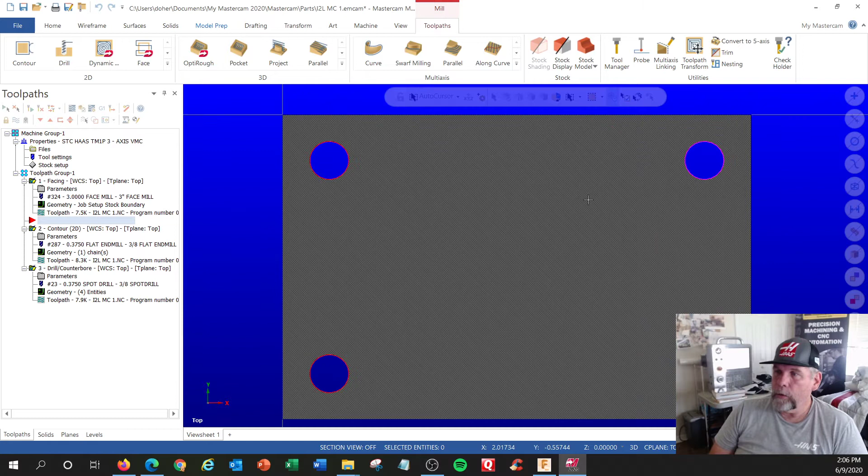All right, so I have my Mastercam on. Here's my Mastercam right here. I'm going to fit the window. Zoom up. I'm going to unzoom a little bit. Scary. All right, so these crosshairs represent the XY0.

And I'll tell you, I'm rambling here, but why you want to learn G-code. Back in the 80s, this was the only way of doing it, and when CAD-CAM came along and we were the setup guys, we could make fixes on the floor because we understood how G-code worked. Plus, we can write a quick program. Coming out of total CAD-CAM, everything works great most of the time, you know. And sometimes you don't even know if you're producing good code because you wouldn't even know what, you know.

It was like my friend who's a music instructor but could not read music. And we used to joke around that he could have the music sheet upside down and he wouldn't know what he was looking at. So same thing with G-code. So it's really not that simple. We're not math whizzes when we started doing this.

So to learn basic G-code is going to be a foundation of your career, because it's been this way, the FANUC G-code style, since, well, when I started in 83, 84, and since then it really hasn't changed much, you know. Just machines get better and they add a couple more codes. And then there's some codes that were never used.

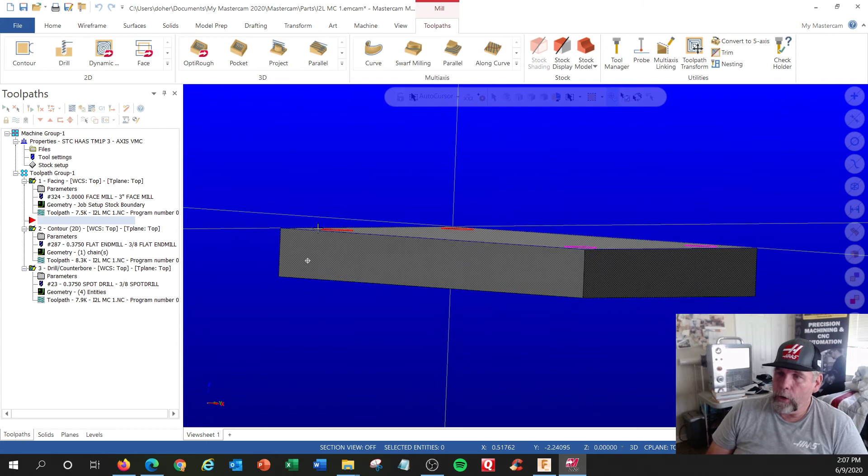Okay, so we got our rectangular block. I'm going to go in the isometric view right here. So there's our block. There's the top of the part. All right. So programming-wise, we're going to have material, right? I'm going to display the stock. There it is right there. It's not quite on center, but when you're doing a setup, if somebody had already programmed this, you're going to find this surface here and that surface there.

Now, if you're edge finding, it'll be edge finder, and then you need to shift it an additional amount so you can cut material all the way around here. If you do not, you're going to end up with this side not cut and this side not cut. It'd be like the saw mark from the bandsaw blade in raw material. So you got to shift this a little bit, 25, 50 thousandths.

And you got to cut it long enough so you have something on the other end. And you got to select material that's wide enough, right? Unless you're going to cut a plate, but you really don't want to do that because your saw cut may not be parallel to this edge and it might fall out of the vise. So you want to pick the most parallel sides to clamp on.

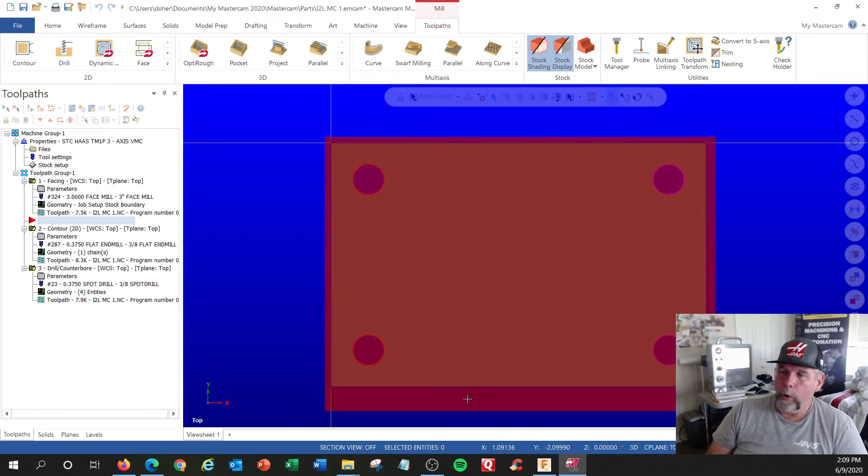All right, and then we're using, I forget what they call this method now, when they went from manual machine to CNC. We're picking material that's taller because we're going to grip on the bottom here. And we're going to machine around it, and we flip it over. Some people call it the hat, and we're going to machine the hat off. Versus manual machining, you'd be just squaring the part up originally and then putting all the features in.

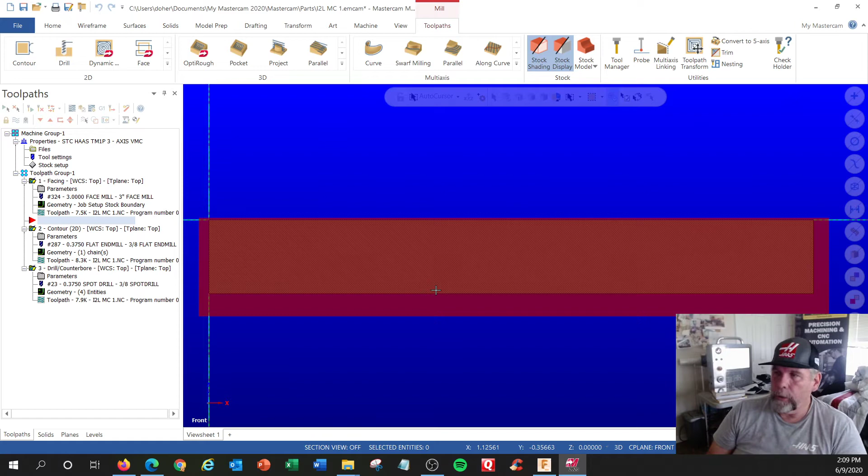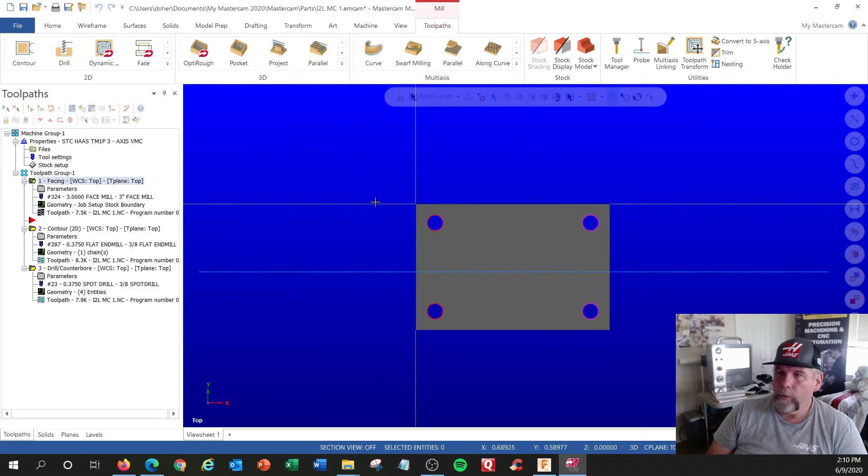So, all right, I'm going to go back to isometric here. All right, so there's our stock, right? I'm going to turn that off. I'm going to go back to top view. Okay. So, let's turn on toolpath number 1, right? And I'm going to turn on fit and the back plot. This is back plot. This is a way to simulate.

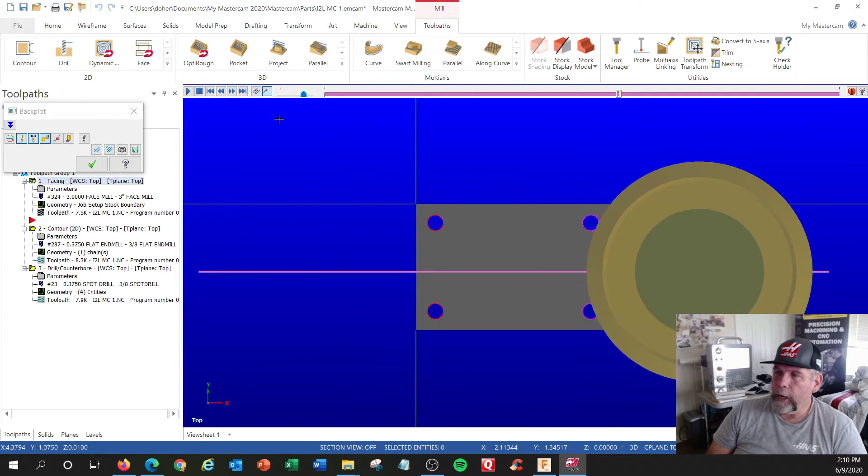So I see our tool over here, right? So if I hit play, it goes across, right? Slowly, or whatever RPM and feed rate you've calculated. It'll cut across the top and get to the other side, right? All right, let's go to isometric view. All right, so there's our cutter there, represents the cutter.

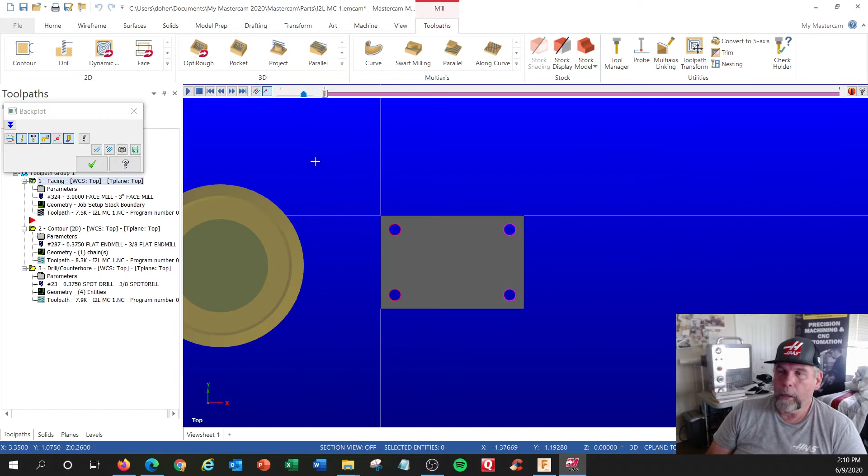So you understand that when you come down, you need to be clear of the material. This position over here is not mega important. Just needs to be a little bit beyond the radius of the tool and a little extra, and somewhere in the middle here, so it can cut across. Let me use the quick verify. Ooh, there it is right there. I'm gonna rewind this thing. Hit my isometric and hit play. So that's where it's cutting. That's its tool path, right? Speed up a little bit.

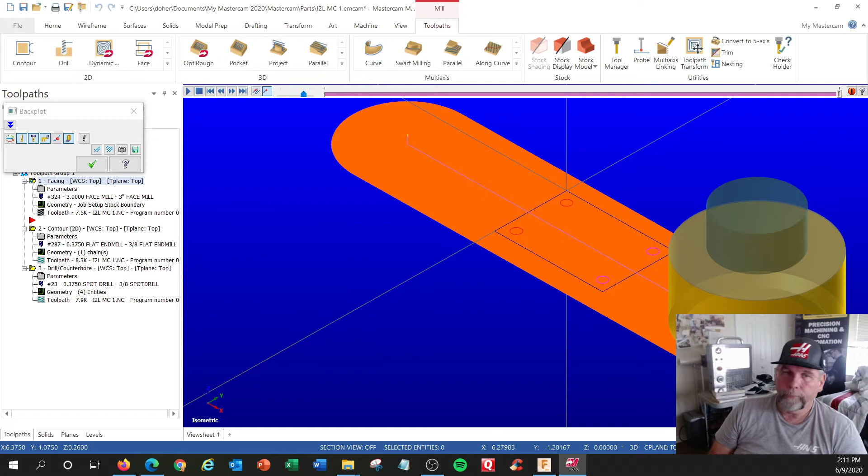And then we'll talk about the first lines of code. So you gotta go get the tool, turn the spindle on in the correct direction at the RPM. Then you gotta reposition to this position right here, and then rapidly come down, but not all the way. And you're gonna engage the tool height offset. And then you're going to slowly feed to the cutting level you want. In this case, it would be Z0. You're going to create Z0. And you're going to go across from here to here. So you go from this XY coordinate to this XY coordinate. Okay. Pretty simple.

All right. Let's go to tool number 2. Basic end mill, right? Turn the path on, and let's see, is that on correctly? That looks like it's not compensated. Fit, and top. All right, let me go to my parameters for a minute here. What parameters? Ah, I've got control on. I want to have wear. Okay. And we got to regenerate the code right there.

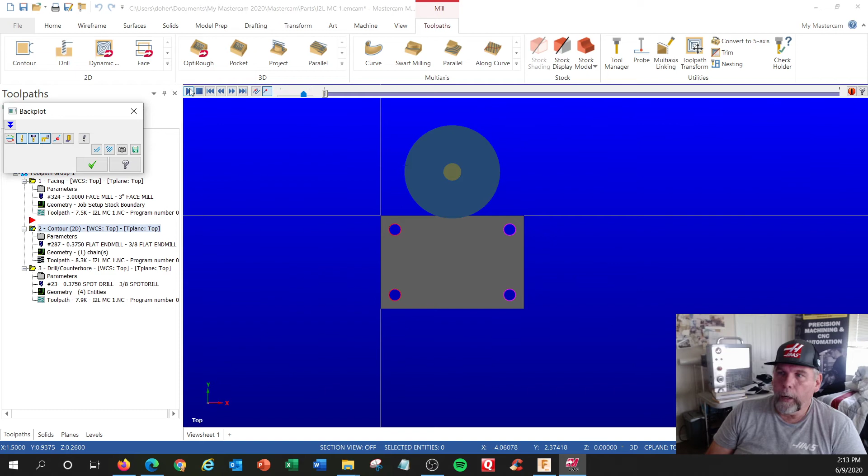Okay. This is the tool path we're going to take. And actually this has got a corner rounding feature. Let me get rid of that. Roll around corners, none. Okay. Regenerate. There we go. This is going to be pretty much what you do with manual code. Let's hit play. Where's the play button? Here we go. Hit play. I'm going to turn off the tool holder, so we just have the tool only. This is a 0.375 end mill, 3/8 end mill.

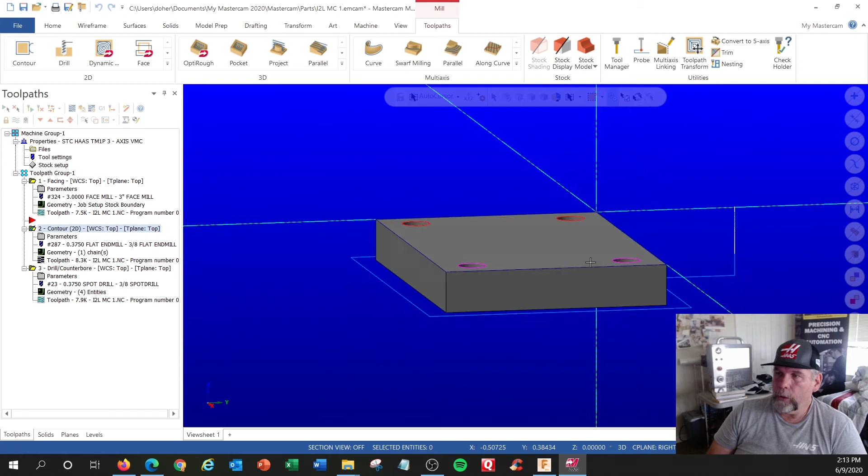Okay, hit play. All right, that's where we're going to go. That's our path. Bink, okay. Let's look at that in ISO view. Oops, let's try ISO, all right, and replay that. So we're going down deep enough to pass the side wall here. All right, there we go.

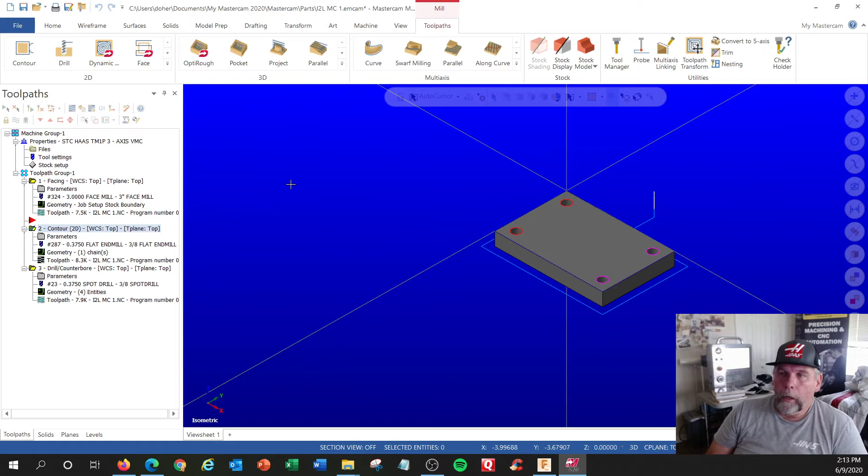Now, if I'm doing it in CAD CAM, top. Right now I'm using wear compensation, which means it's going to put the tool in the right spot, and I don't need to say what size the tool is when I go to set it up. I just set the length only, and I leave the geometry at 0. If I use computer, it does the same thing, only you don't get cutter compensation, which means you don't have any adjustability.

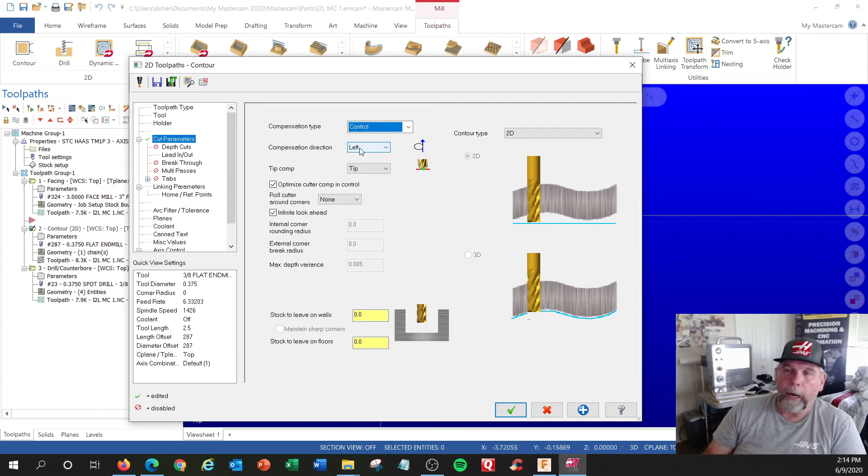And if you use control, this is going to simulate exactly what you would program by hand. And you're going to get your cutter compensation, right? So this one is programmed. Let me hit play again. Play. And it does the same thing. Only with this code, you have to put in the size of the tool. Our machines are set up for radius geometry, so on this one we'd put in 0.1875. And if you set up for diameter, you put in 0.375. So you got to declare the tool size.

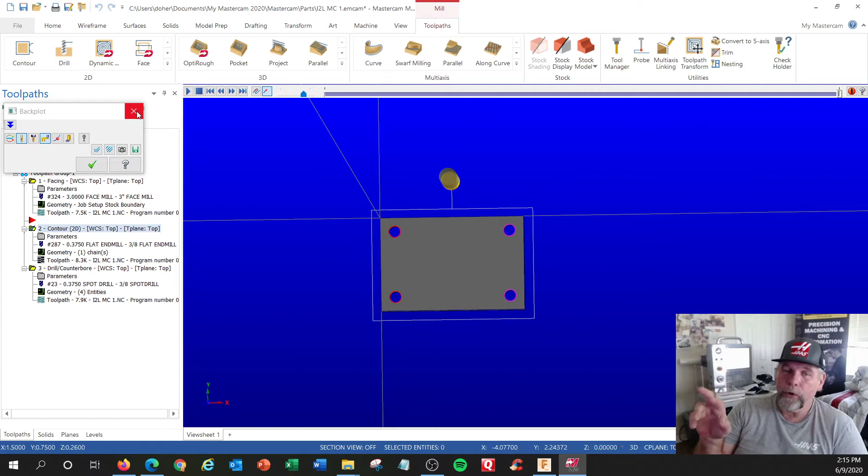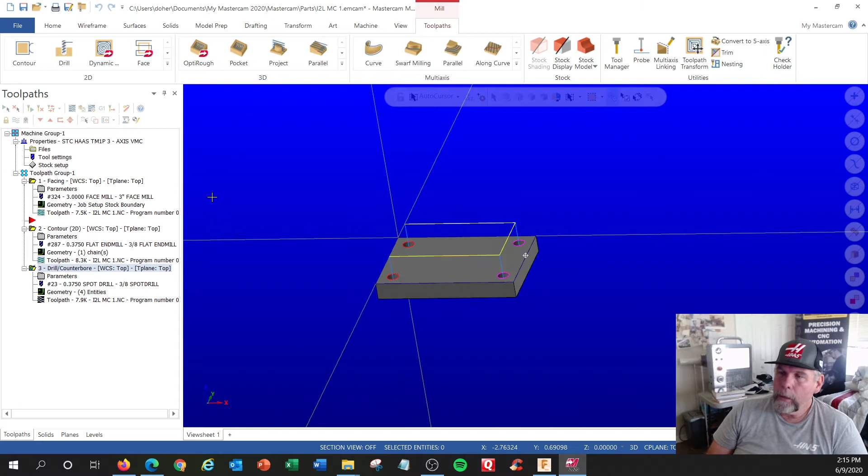You're going to get your height offset, and you got to manually enter that, unless you're using the rotating and diameter probing method. But I would just manually enter it. It's a lot easier. Okay, and then we get drilling cycles. We'll just go over that real quick. I'm going to turn off this one and turn on that one. All right. This is giving you a preview of the drilling cycles here, but I'm going to hit play. We got a spot drill. It's going to go point to point.

All right. And then if you wanted to drill the hole, you just add on another cycle that's almost a duplicate of that with just a different tool number and a different code, like a G83 for peck drilling versus G81 or G82, just spot drilling.

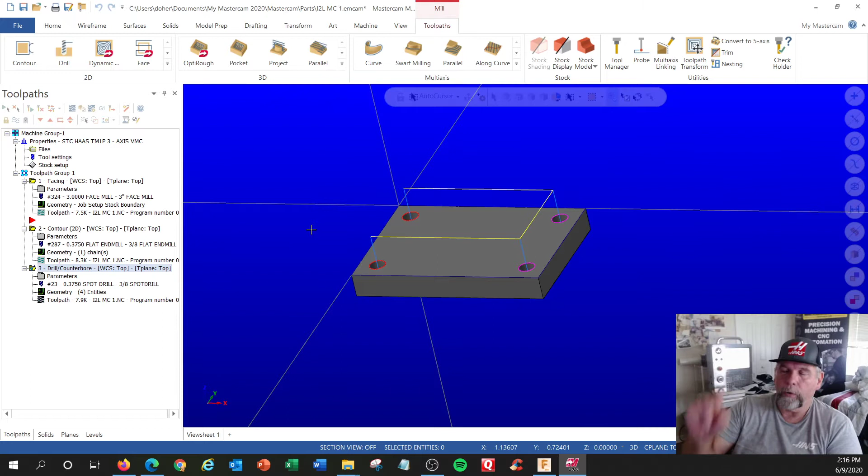All right, so let me go over some details here. I already discussed the face mill. Let's look at this one here, but I'm going to put it back in the wear compensation, because this is the tool path where it's going to go. Personally, I select up in the upper right corner, but it's not that important. So if this is our X0, Y0 right here, then I would call this real simple, like X minus 1.0 and Y positive 1.0.

Let's pull our print up here. All right, here's our print, 3 inches. So if I went to do just what is on the screen there, I would go to X 1.5 and somewhere up here like Y 1.0. And then I would go to this Y0 coordinate and turn on my cutter comp and go to these positions. Boom, boom, boom, boom, and then go around the corner. I call it crossing the finish line. But over here, we'll just go over here, and then we'll start up here.

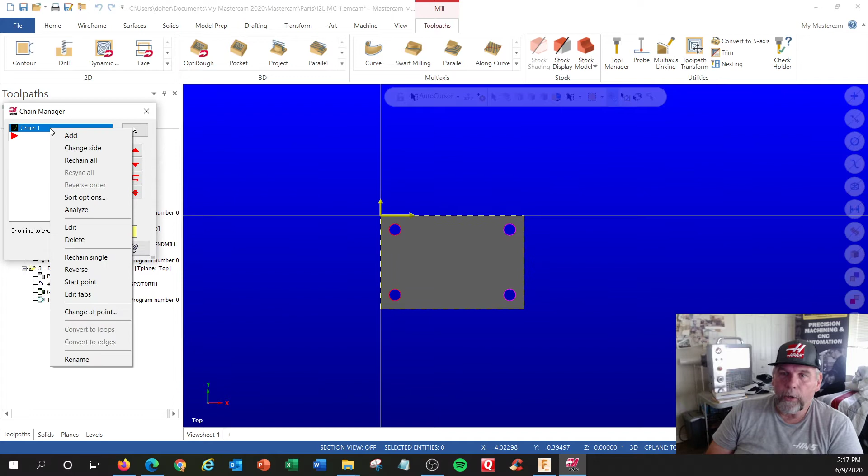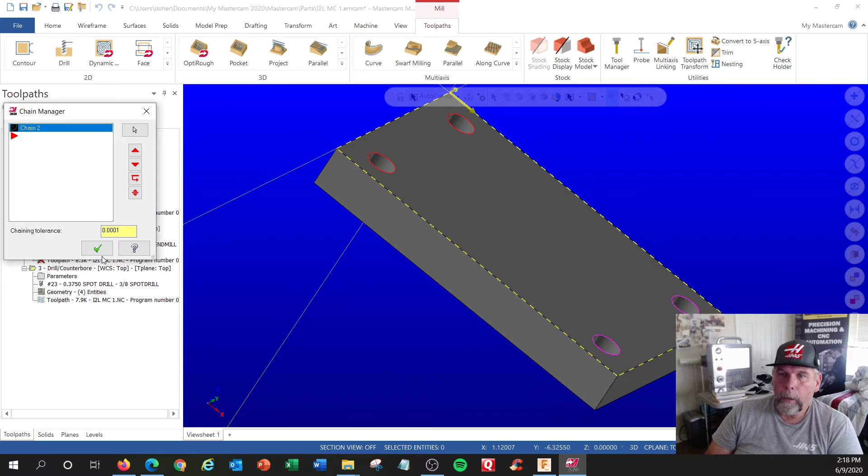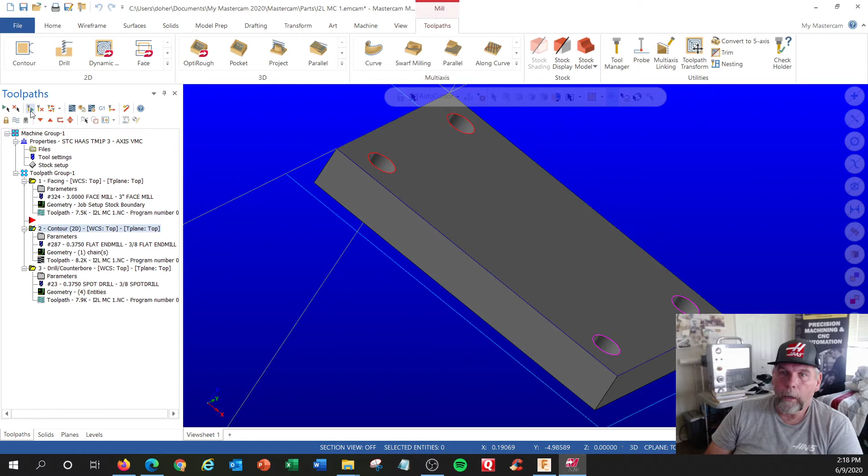Actually, I think I'm going to reprogram this so it does it the way I want it to. So geometry, selection, I'm going to rechain, and I'm going to select, where is it now? Oh, it's metric. All right. It's going to be this profile here. And I need to start at the beginning. Where is that selection? Lead in and out, I think. Midpoint. We don't do midpoint. Got to start over here. I'm going to regenerate. I hit top view. All right, there. That's how I usually manually program these things.

And I'm going to add in a, let's see, length 200. I'm going to do a 90-degree angle. How do we do that now? Tangent, not perpendicular. It should be perpendicular. Nope, that didn't do it.

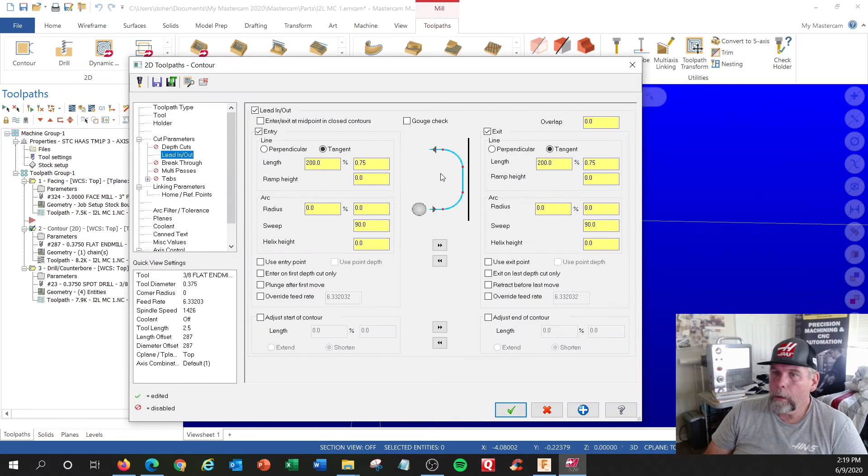Okay, I'm back. I fixed it the way I wanted to. I'm going to start in the upper right corner here. So this will be my start point, and the yellow lines represent the rapid moves. I'm going to feed down to the bottom of .375 and go a little bit more and walk around this. So I'm going to hit top and replay this again. Hit verify and play. There we go. Goes around, and across the finish line and shuts the compensation off.

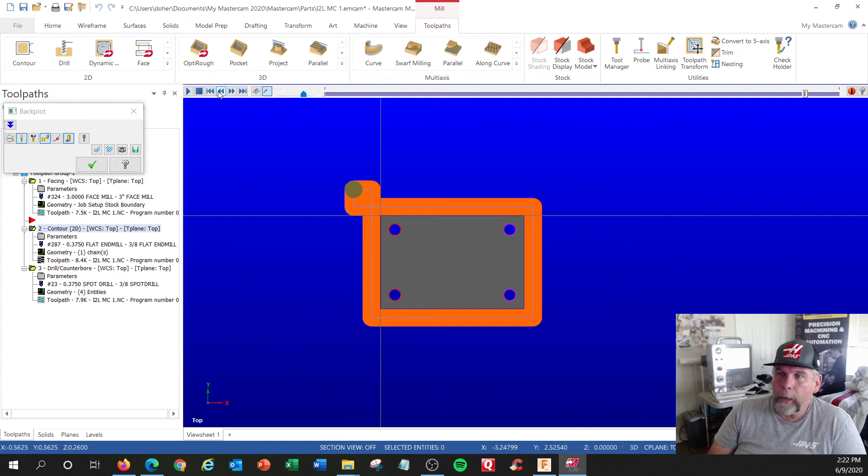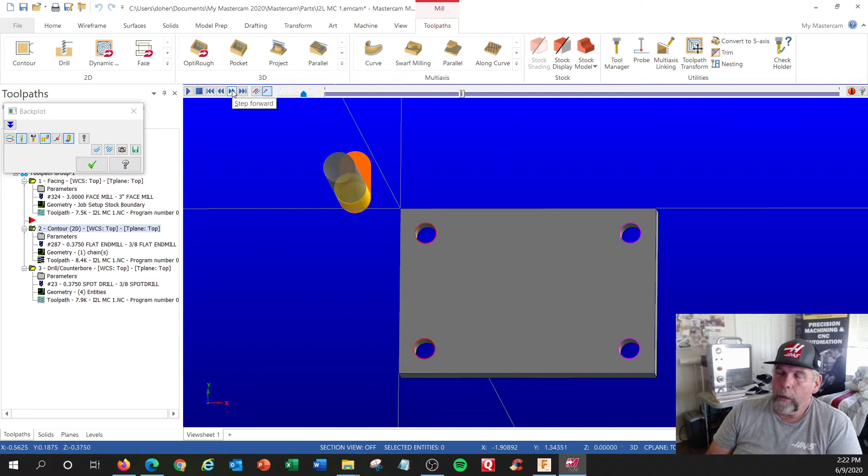This one here is the move you need to turn on cutter compensation. So as you're approaching Y0, which is here, in this case this is tool 2, you're going to say, turn on the cutter compensation value that I have in the tool offset page. But I'm using Y0 as the coordinate. If I did not do that, this tool would be right over the middle of this, and this would be way too small.

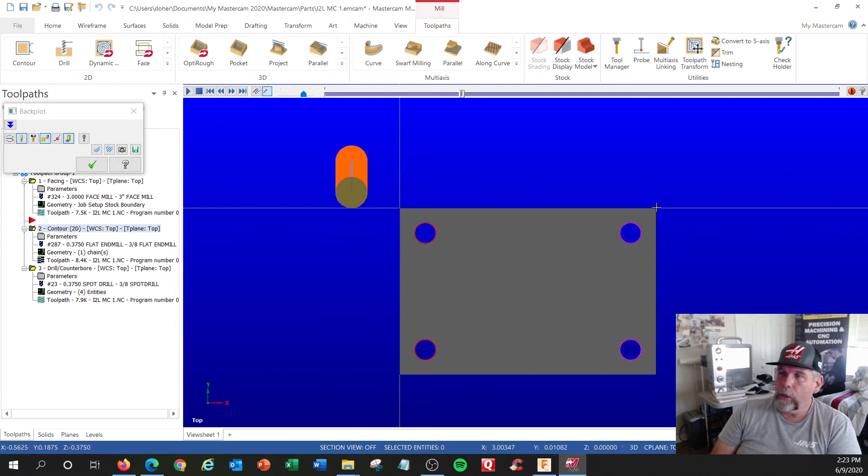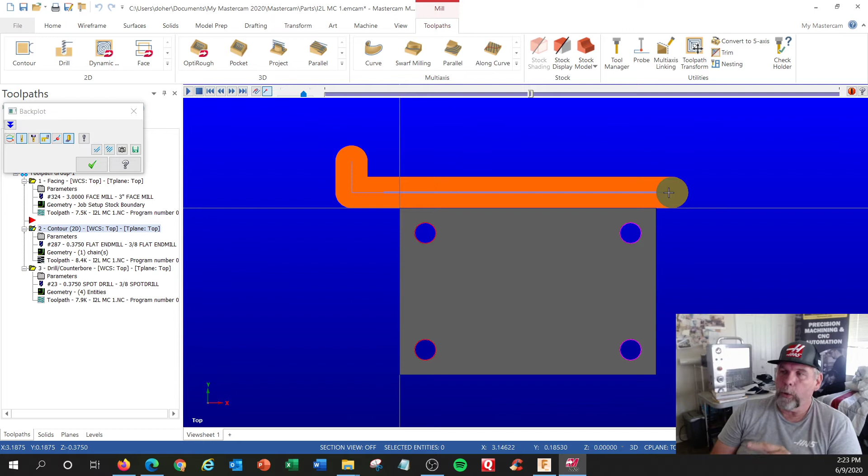Let's go to the next step. Then I'm going to say, go to this corner coordinate, which is X3 and Y0. Right there. But in reality, I wish I put a 3/8 end mill here. It's 3 inches plus .1875, 3.187. That's where it actually ends up, because it's taking this coordinate and adding it to it.

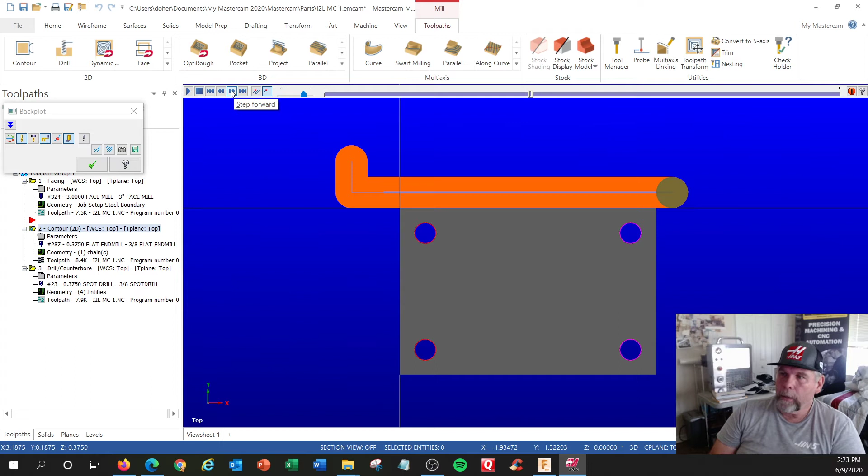And as we're going in here, we're using G41, and we always use G41 because we always want to climb mill. Left is the climb milling side. We rarely use G42. It's going to compensate. Even when you're coming in this way, it's looking ahead, like a swami. And I'm going to go down here, and up here, and cross the finish line. We made a nice rectangle. And then we have to shut the compensation off, and that's this last move. And I just go back to the same position. It's pretty basic.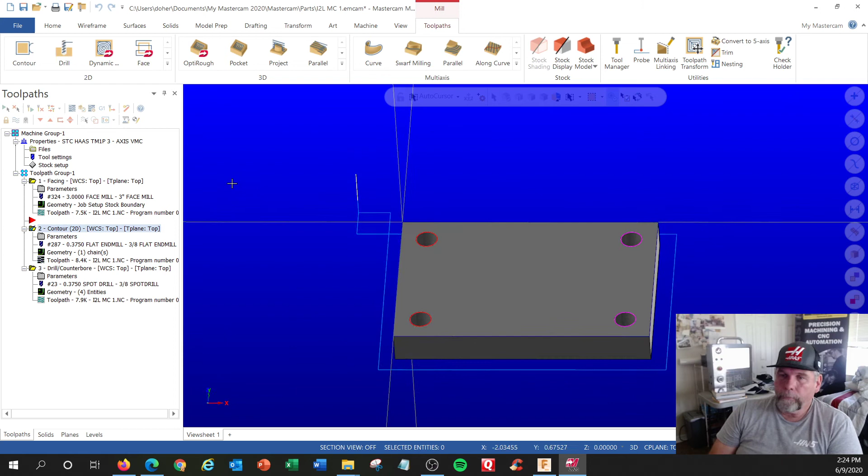And then the drill cycle. I'm going to turn off this tool path and turn on this one. All right. Let's go back to simulation, backplot. And this is a 90-degree tool. Typical spotting drill for your soft metals. All right, how deep do we go?

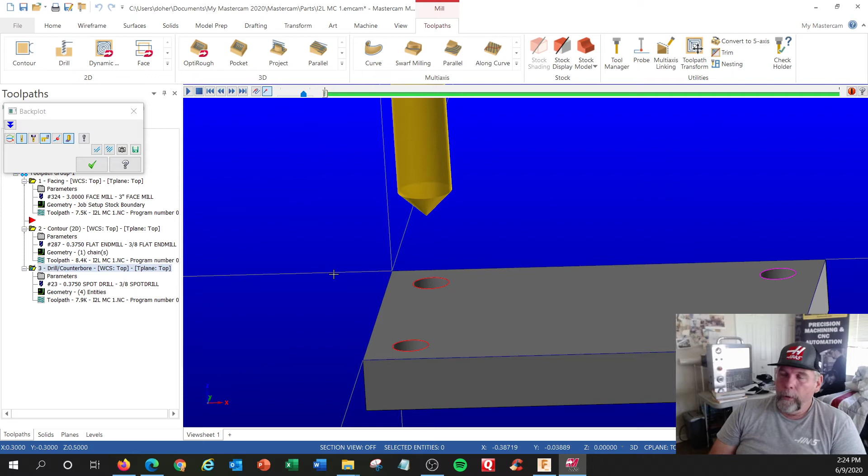You know, if you have the little Haas mini book that they give you, there's actually a page in there that you can do quick calculations of like 82 degrees or 90 degrees or 118 degrees. That's for your normal drills. But a 90-degree tool is a pretty typical spotting drill, they call it. And a lot of us like to get the spotting drill to spot and leave us a little chamfer, so we don't have to come back with a chamfering tool. But you're prepping to run the big drill through it.

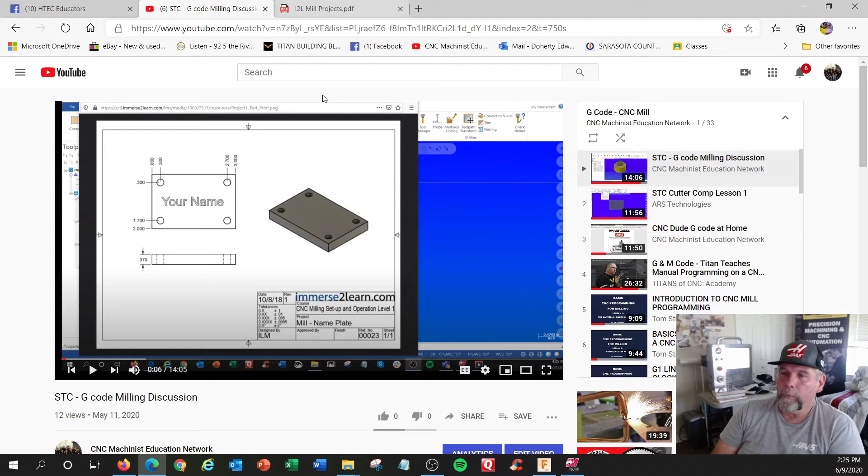So how deep do you go? 90 degree is actually pretty simple. If this hole was 250 diameter, according to the print, right? I don't know what size they are on there, but I think I looked it up. It was 250. Then it's actually not even the Pythagorean theorem, but it's half as deep as it is wide. That's going to be your Z. And if you're calling the top Z0, to make this 250 wide, you would go 125 deep. That would be your Z.

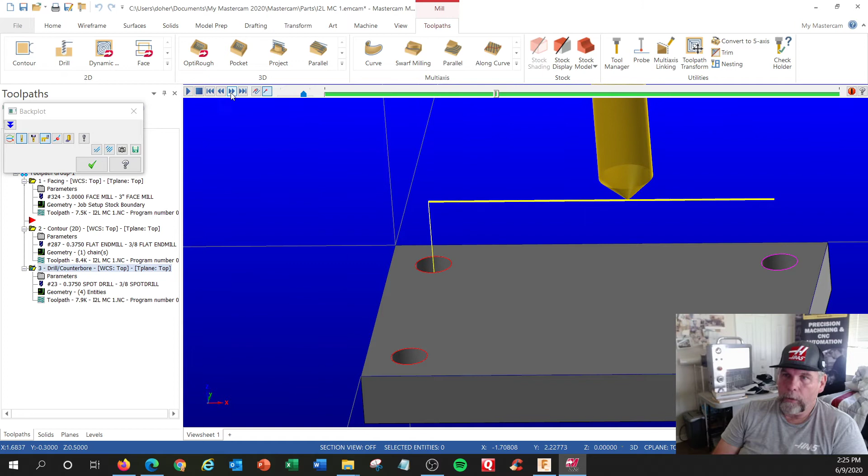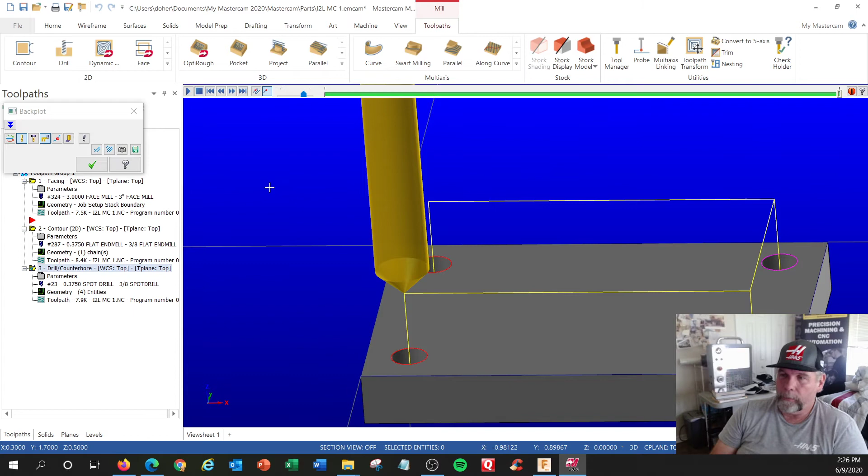All right, hit play. Let me leave the verify on. Oh, I guess it doesn't do it now. One step at a time. So this would be your canned cycle, we call. In the background, it's running G1s and G0s, and you can literally program it longhand. I think back in the late 70s, they were doing it like that before they came up with the canned cycle, if you want a history lesson. So it would rapidly go to position, and then if it's up here, you might rapidly go to just above it, which is an R level.

And then you feed to the depth you want, and then you got to decide where you're going to return to. That's the G98, G99. And if you watch the video with the carbide drill that breaks: if you need to return high, that would be the initial position, and that would be G98. If you say G99, it's going to return to the R position if they're different. So normally, especially if you want to jump over clamps, G98 is always the safer selection. And you can figure out how to save time later.

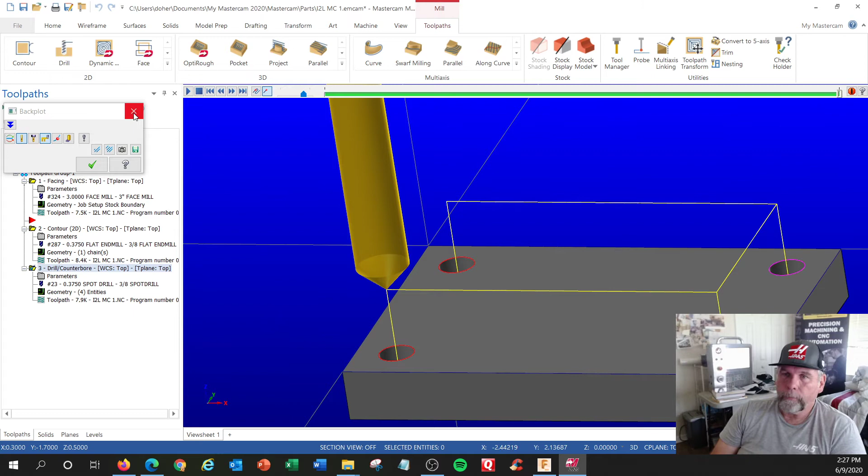Okay. Manual G code, right? Here we are. You got to put a % sign up here. And then you got to give it a program number, the FANUC format program number. You put letter O and, I don't know, 1, 2, 3, 4. I come from the 4-digit era, and now they're 5 digits. So you could literally just put 1, and it's going to be 00001.

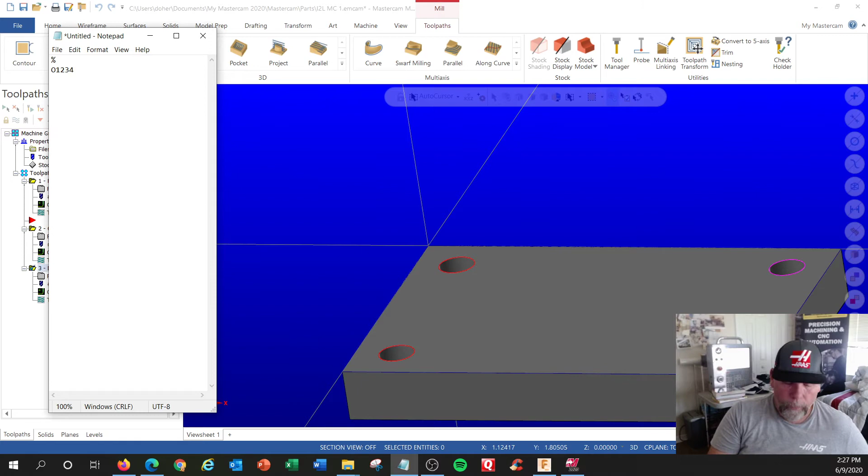And I get in the habit of putting my name on the top, and say STC1 Ed D. Because if we're in class, we might all be using the same program number, and I don't know whose is whose. Besides, I want to know what the project is. So I might call this the Immerse2Learn 1, right? Okay. So it's in the control. You can see it right in the library. All right. First line.

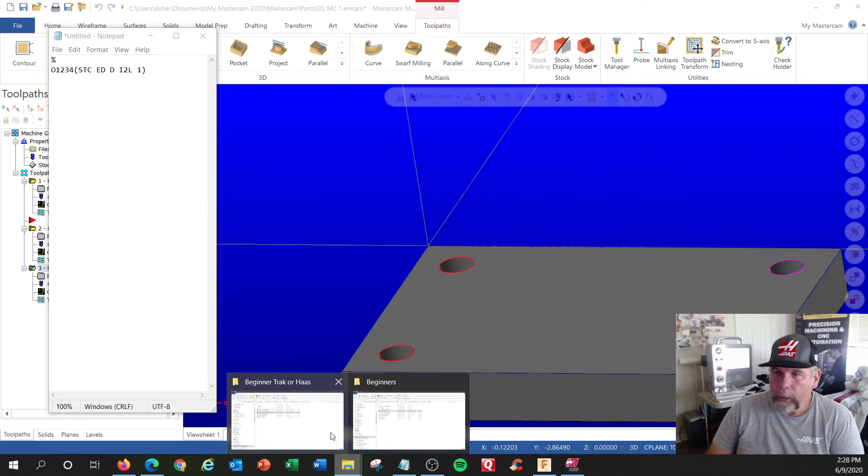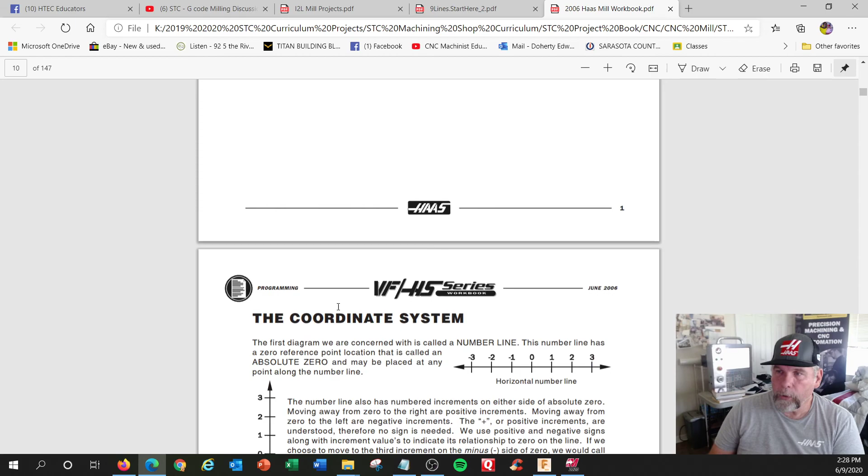And let me bring up my Haas workbook in my library here. Good reference material. A good trick I used a long time ago was to mark the first 9 lines right here. Sample of code, right? I used to keep examples of the code in my toolbox, especially on machines I did not run that often, because I would look at it and say, oh, I remember how this goes. So here we go. We got some samples of code here. It's a great book.

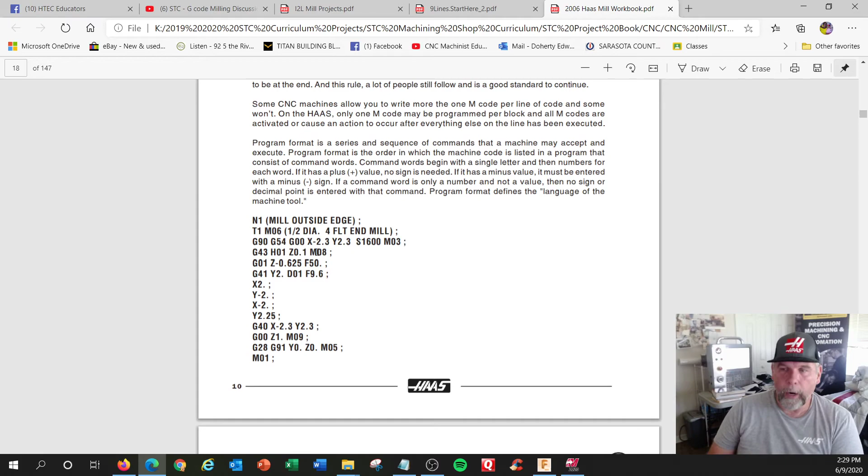Get past the X and Y's. All right, up here. So here's a sample of code right here, and there's a bigger one up here. This is a sample of the first couple of lines: tool change, position move, turn the spindle on, and turn on the height offset. These are all standards. It doesn't matter if you use T1 M6 or M6 T1. It reads the whole line; it doesn't do the line in order. And this one's got the position and then turn the spindle on. So it'll all work.

All right, so I call that the gazinta, you know, to get over in gazinta. And then you got to do something and then get out of there. So, all right, so I use these examples right here. So you notice it says % sign, program number, and name, and then write some code, right? So that's what I'm going to do right here.

Notepad, all computers have it. So if you're doing this and you're running it in the simulator or you're running in a real machine, you know, and this applies to other machines also, FANUC-based machines. Okay, so typically I was taught to use a safety line. And I guess it's not that important anymore. But let's get into the basics of G code, right?

I leave my caps lock on. Oh, I hit tab by mistake. All right, I hit tab again. Crap. All right.

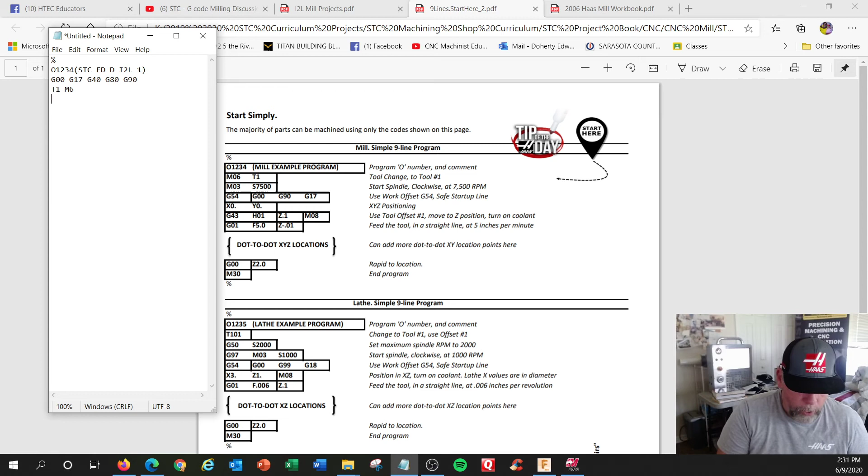All right, now what? Let's get a tool. Tool 1, M6. And you learn after a while how to do shortcuts. That T01 and T1 and M06 and M6 are the same thing. In this case, you don't need to type in what we call the end of block, the semicolon. You don't need to do that. Okay. Now, we got a tool. We got to go somewhere. Or maybe we'll just turn it on. M3 S2500. All right. Now it's spinning.

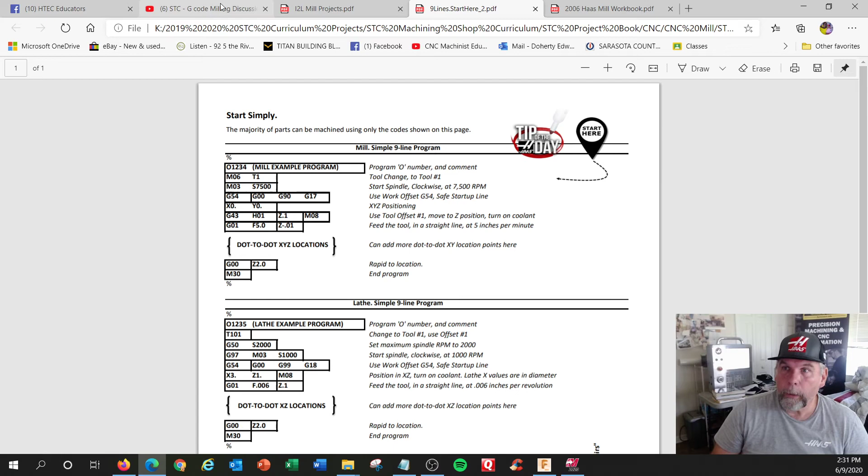Now we need to go somewhere, right? We got our print. Where's our print here? Print. All right, print. My print right here. So if it's a complicated part, I would take the paper and I would write down all the coordinates here. And then when I go to write the program, I'm just reading the coordinates off.

All right, I'm going to use my upper left method. So I get in the habit of doing G00, G90, G54. Get in the habit on every tool change. X minus 1.0 and Y 1.0. All right, I'm in position. Now I need to get the tool down there with the correct height offset. G43, nobody uses G44 anymore. It's H01 for the height offset 1 that aligns with tool 1. And where are we going? Personally, I like to go to Z1.0.

All right. So it's going to engage the height offset and it's going to rapidly move because G00 is considered to be modal. And once it's in that mode, positioning mode, it'll do everything rapidly. And it's going to do it with the G43. All right. Now we get the tool down there. Then we go, I need coolant. Turn the coolant on. M8 or M08.

Now what? Now we need to do something. We got to go to the depth of this thing. So I'm going to go G01, I'm going to change modes, and I'm going to go Z minus, and just for learning purposes, as Titan would say, I'm going to put it to the depth of the wall. Usually I added 10 thousandths to that. And I got to pick feed rate. So you got to have all this stuff pre-figured out. I figured out I'm going to go 50 inches a minute, even though it's not cutting anything, but you got to have a feed rate. You don't want to rapidly go down to something that's scary.

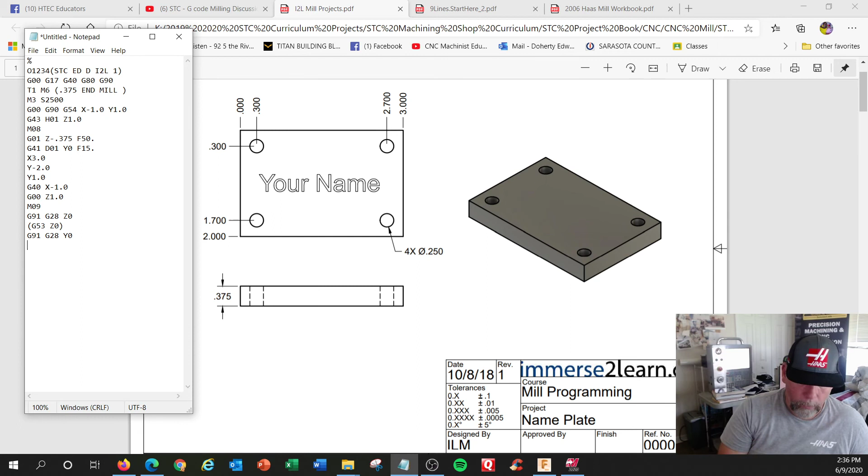All right, tool is up, and if I'm just doing this alone with no face mill, I would like the table to come to me, which is Y0 home position, G91 G28 Y0, only necessary at the end of the program, not anywhere in the middle, and then we got to shut everything off with M30.

The code is actually from the paper tape days. Here's another history lesson of reset and rewind. The tape would actually rewind and go back to the beginning. In this case, it just automatically goes to the beginning. The older code was M2, and that was end of program, and it would just stay right here. So, not used anymore. And we got to put a % sign at the end. So that's the end.

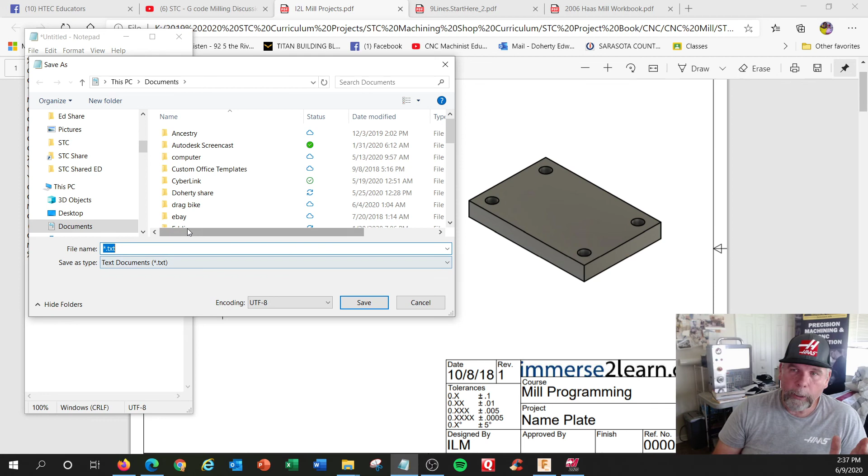And then I'm going to hit File Save As, and I got to give it a name. And a Haas machine can read text files. It took me a couple of years to figure that out. So I want to name the file. You can actually literally name the file differently, like a different number than what's in there. Probably not a good habit.

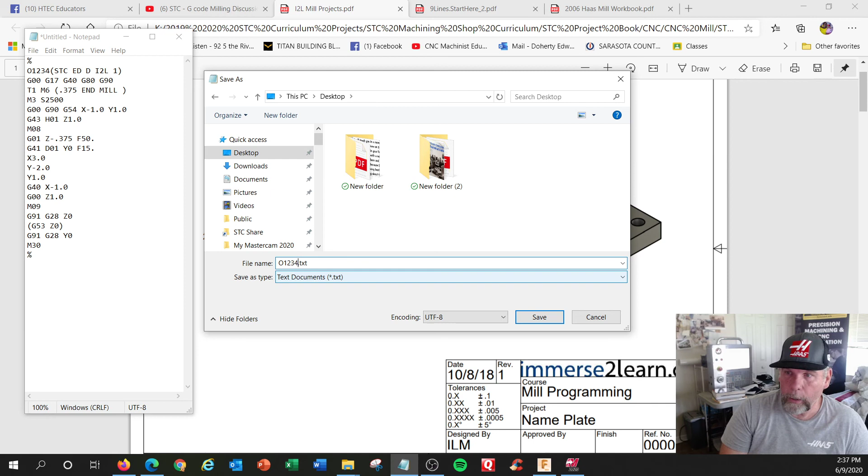So you can give it a name, or you can give it a program number. Program number, if you're trying to keep these things, you got to have better records. But in this case, I'm just going to call it a program number. So I'm going to call it, caps lock on, O1234.txt, right? Save.

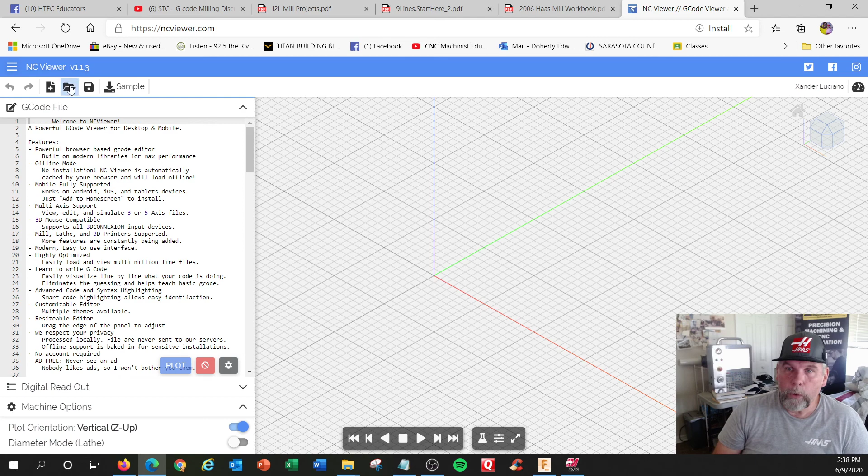And if I turn on my NC viewer, this is an online NC viewer right here. It's an online simulator, an isometric view. Open file, go and find it. Where's my, there it is, 1234. Open, there's my program right there, and I can look at it and see if it's correct. And, ooh, it looks like it ain't correct.

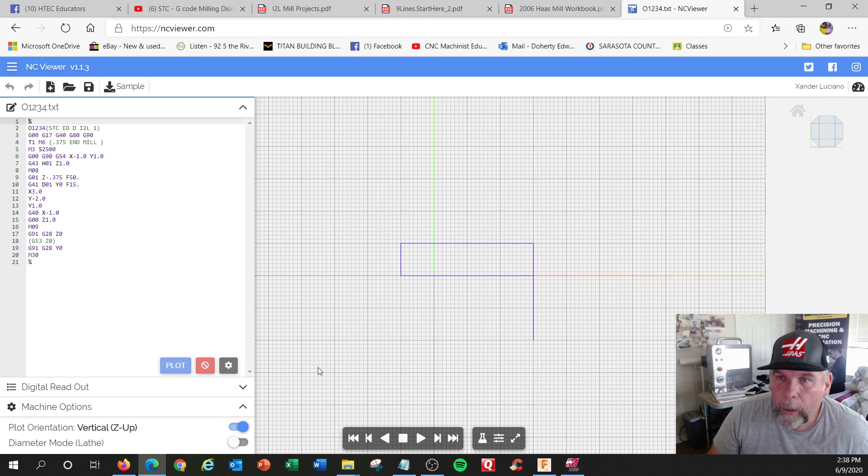Okay, let's go to top view. What is wrong with that picture? Maybe we'll have to fix it. All right, hit play. Let's go step by step. Step 1, let me zoom up here. Oh, let me go ISO.

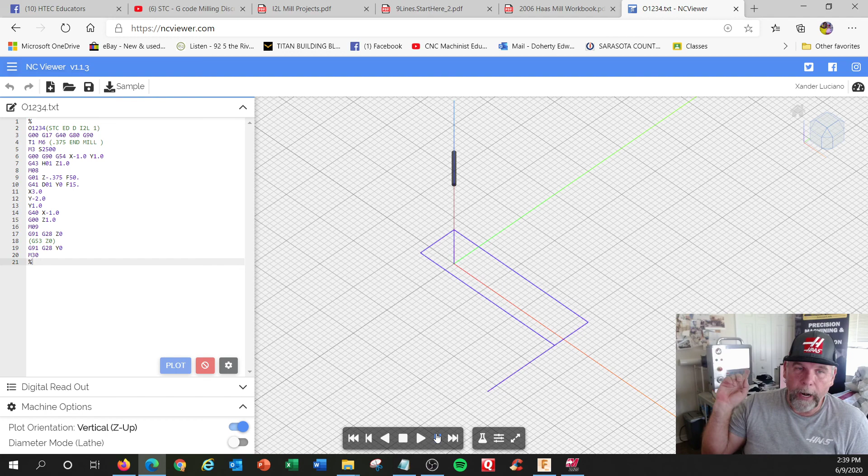Now, if we're using a Haas simulator to just do some training on, you run the graphics mode, and it gets you this kind of view. It won't give you the isometric view, it gives the top view. All right, is this step by step? Oh, let me rewind it. Back to the beginning. Okay. 2, 3, 4, 5. All right.

All right. 375, Y0, X3, Y-2, and oh, I missed an X move. I went back and forth. Let's fix the code. Right here. See, X, Y, Y. I missed one. I need to go to X0. I think that's all I need to do to fix it.

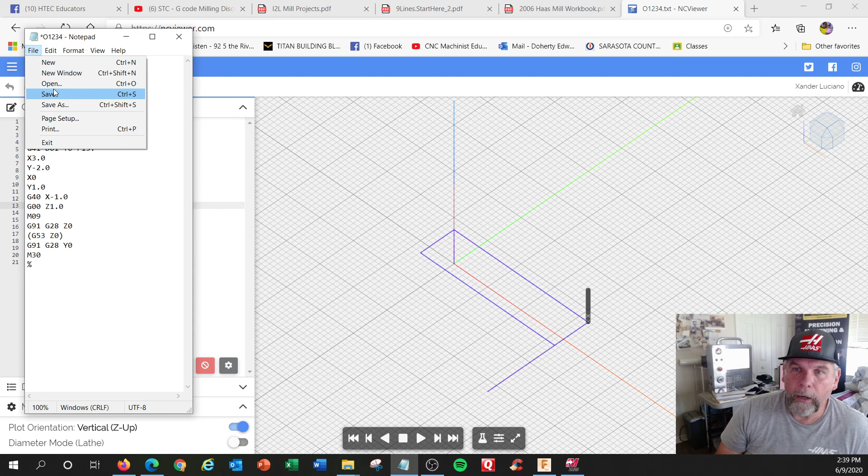File, save. You'd be at the machine, or if you did it in the simulator, you could fix it in the machine. In this, I'm going to just reload it. All right, I'll reload it. Oh, look at that. Fixed. Actually, I'm glad I made a mistake. I'm not perfect. You can fix things. Learning how to fix things is going to pay dividends in your life.

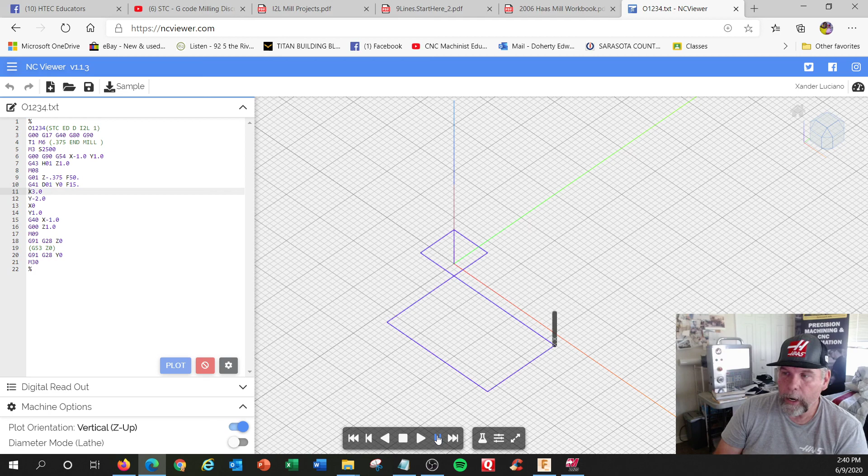Alright, so we go step by step, inch by inch. I'm going to start there. That's my start position. Comp on. Go to here, go to here, go to here, go to there. Done. Shut the compensation off. Get out of town. Done.

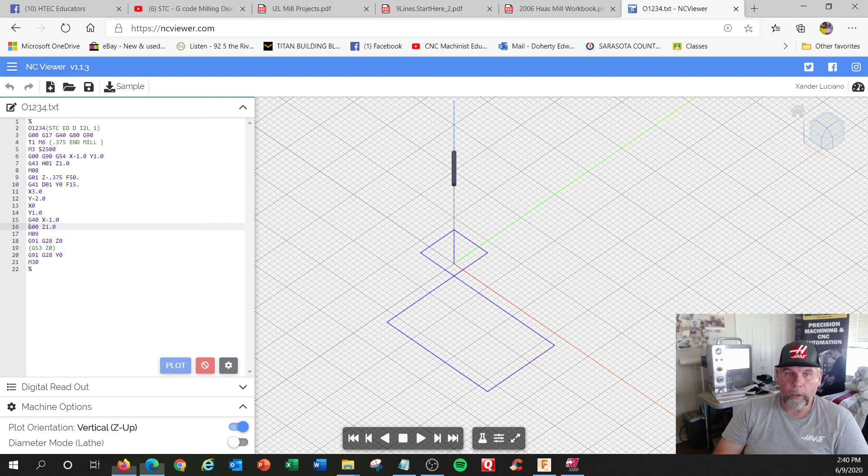Okay. I'm going to do part 2 on the drilling cycle and the face mill cycle, but that's a real basic G-code lesson in my kind of style there. Oops, turning the wrong things on. So using this kind of simulation, we're doing the same thing. Let me put it back to, let's see, toolpath on, here we go. And simulate, backplot, and go.

So you're writing to the coordinates of the part, and you're telling the machine what size the tool is. Later on I'll also get into the benefits of why you would want to do it that way, and tricks I use to do roughing and finishing using the same program.